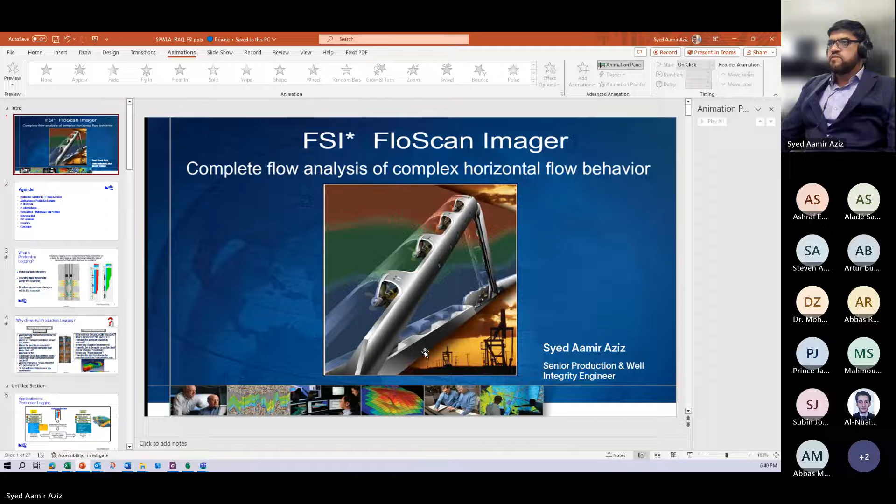Let me share my screen. Okay, you can see my screen, right? Slide view, clear. Yeah, okay.

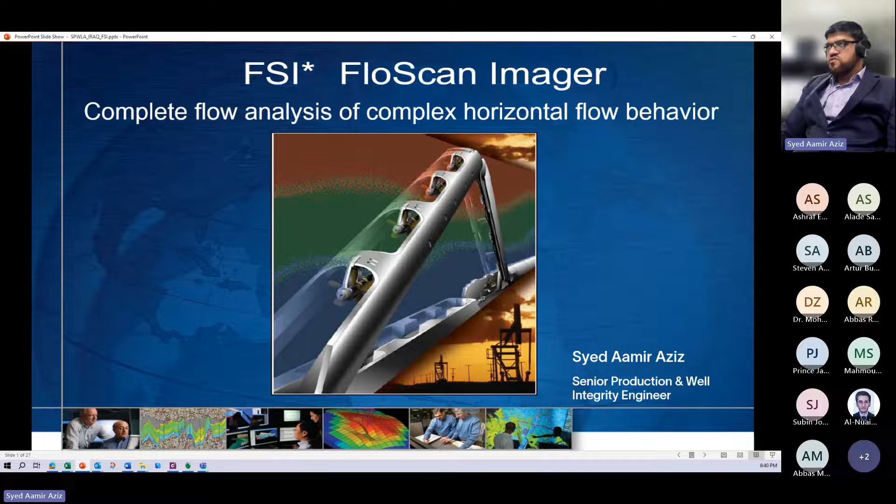Crystal clear. Okay, so today I'll be going through the FSI, FloScan Imager, an advanced production logging tool especially designed for horizontal and highly deviated wells. So we'll follow this agenda.

First, we'll talk about the basic concept of production logging, why we run production logs, what are the applications, benefits and advantages from the client perspective, and from a reservoir engineer or petrophysicist perspective, why do we need to run production logging and what problems can be solved by it.

Then we'll go through the production logging workflow we usually follow for acquisition and interpretation. Then I'll describe the techniques of production log interpretation in vertical wells, which is simple, and then more complex interpretation in horizontal wells, using the tool for horizontal logging, the FlowScan Imager or FSI. We'll have an overview of the FSI tool, how it works, what sensors it has, and finally I'll describe some examples or case studies for the FSI.

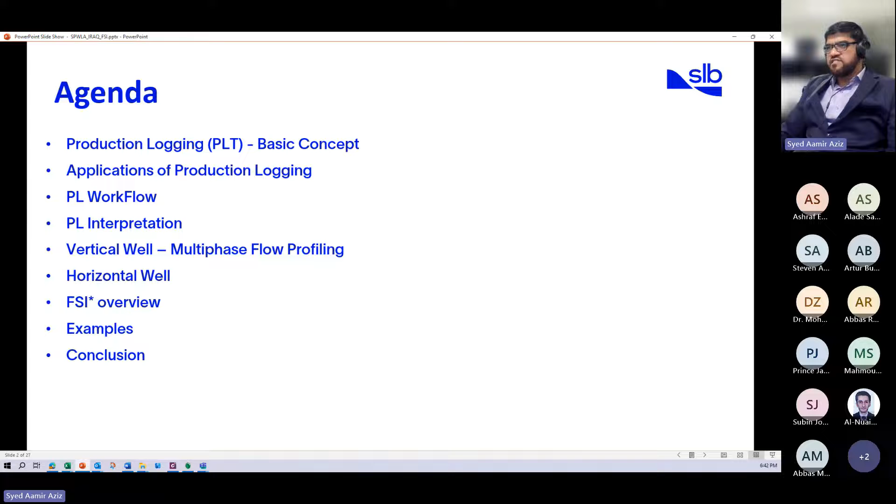So let's start with the very basic question: what is production logging?

So we know production logging is basically the measurement of downhole fluid parameters in an oil well or gas well, whether it's a producer or injector, when we want to know the production at downhole conditions and the zonal contribution from each perforation, what is being produced and where it is coming from.

For example, what is the source of water production, what is the source of gas production. All this information is acquired by running production logging tools, or PLTs, in vertical or nowadays horizontal or highly deviated wells. So the basic concept is to know the production profile downhole.

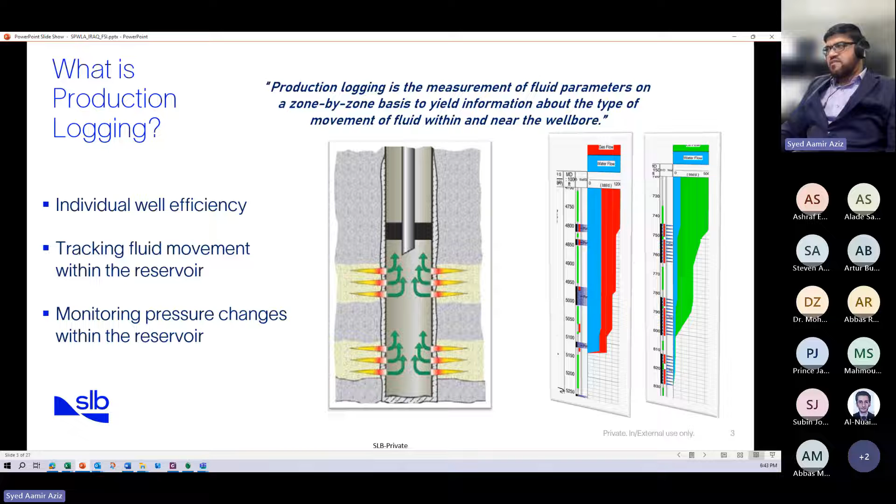This is the final answer of the production logging. What we get is the production profile of water, oil, or gas. Usually water is represented by blue, gas with red, and oil in green. So from each perforation, let's say you have a set of perforations in a vertical well, we learn what is being produced and where that fluid is coming from.

All this information, and more than that — it's not only about the production profile, but we get many other answers from production logging that we will see in the next slides, which is why we run these production logging tools. So there are some basic questions: why do we need production logging? Why does a reservoir engineer decide to go for a production logging tool or PLT? Why does a petrophysicist or any other engineer look for this information? There are some basic questions — what and how much is a well producing, and where it is coming from: water, oil, and gas.

If we want to know the contribution of what the well is producing and how much, usually we get surface test results, and we know from the test result, without running the production logging tool, how much the well is producing. But we don't know where that fluid is coming from. That's why we need production logging tools — to go downhole and locate the water, gas, or oil entry points, to do remedial work or to know the well's production profile.

In case of injection, a well could be either an injector or a producer. If it is an injector, we want to know where the injection water or gas is going, into which zones. Why is the well having a high water cut? In case a well starts cutting water, then definitely we want to stop that water and do a kind of bridge plug or other remedial work.

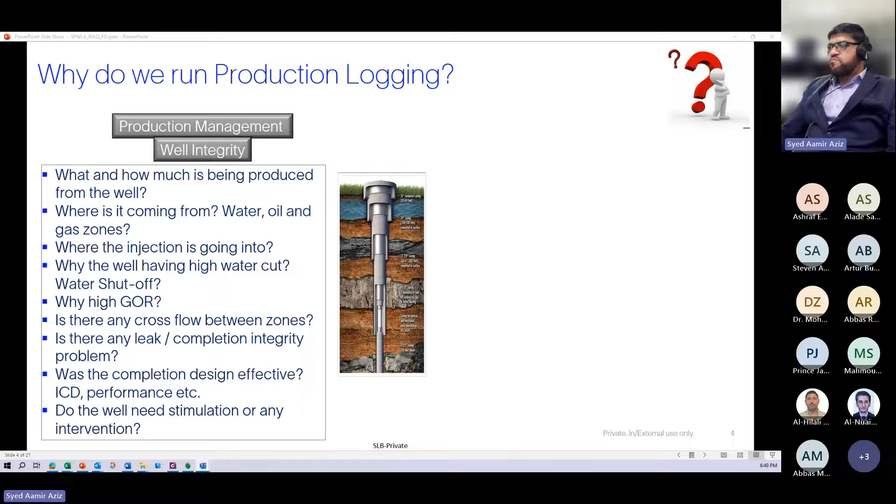And by the way, all these questions are basically for the production management or well integrity. So this is one aspect of the production logging. Nevertheless, the other aspect of the production logging is the reservoir management. This is on a bigger picture. So we do a production logging on a well by well scale. Secondly, we use this production logging data as on a bigger picture, on a reservoir level or on a reservoir level scale for the reservoir management.

So what are the uses of production logging data in terms of reservoir management? Is the reservoir dynamic model updated? So this is mainly for the reservoir, and this is, let's say, long-term design or long-term benefits of the production logging. On the left-hand side is on the well basis, and the short term is when you have to decide something on the basis of well production or well management. On the right-hand side is for the reservoir, and it's a long-term.

What is the current oil water contact or gas oil contact? Because reservoir conditions keep changing when the reservoir is put on, when fields are being developed and a lot of wells are being drilled and put on production. Then the reservoir oil water contact, gas oil contact - these contacts usually vary with time. So we need to closely monitor, as a reservoir engineer, all these parameters of the reservoir and put them into our reservoir model to get the updated dynamic reservoir model.

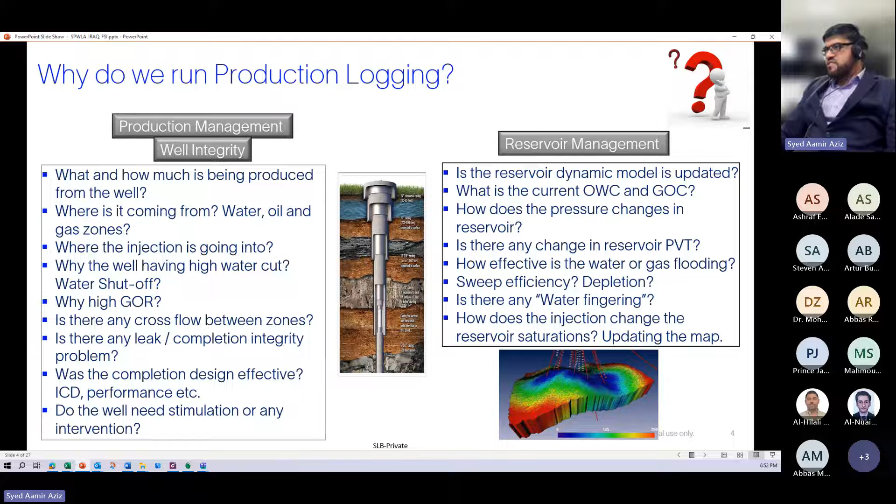How does the injection change the reservoir saturation? So when you put an injection strategy, then definitely you want to monitor the injection or water flooding because of the injectors, and how effective it is working as a strategy to produce more oil and restrict the water. So all this information can be obtained from the production logging, and hence the reservoir model can be updated with all these parameters.

What are the applications? Like we discussed already, we have a lot of different applications of production logging. It's not simply to know what the well is producing, but this knowledge of production logging, or the data, can be used in many aspects.

So you can see here - the production logging data is used for basically two purposes. First is the production management, and secondly the reservoir management, which is on the right-hand side. So the production management is the reactive fast loop, when you have to decide to run the production logging in terms of protection or restoration or generation.

There are many applications, like knowing the cross flow, zonal fluid, injection profiles, reservoir pressure changes, gas banking, PVT, and also well integrity issues like leaks, corrosion, and scales on the wellbore basis. So these are all applications of production logging in terms of production management.

On the other side, in terms of reservoir management, we use production logging data for simulation, mapping and monitoring, like gas oil contact, depletion, sweep efficiencies, skin factor, and reservoir boundaries. So all these applications are for the production logging data, and we get the answer to all these questions by running the production logging tool. These are the main applications.

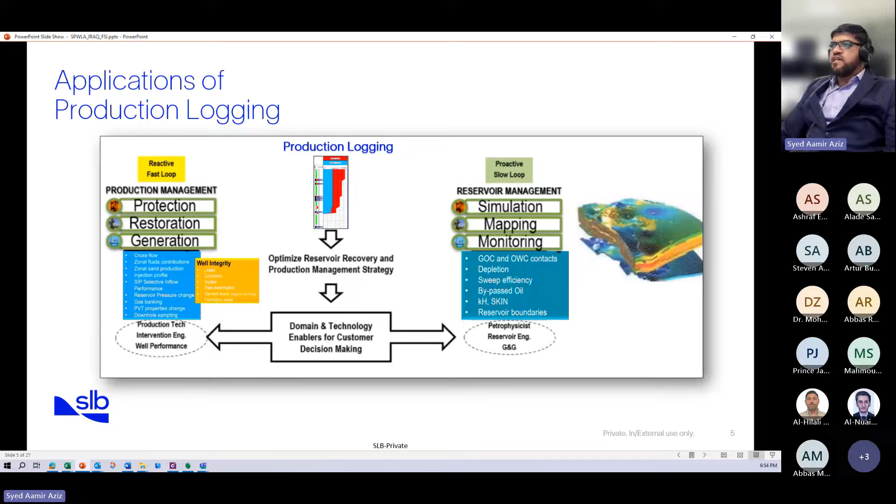Now, the technologies we use as downhole tools for production logging - the oil industry has been using these production logging tools for many years, many decades, from simple to complex, and there have been a lot of advancement in production logging tools.

Then we have some fluid identification tools. So when we know how much fluid is being produced, we want to know what is being produced - whether it's water, oil, or gas. So we need to distinguish different fluids, water from oil, or gas from water. We need some downhole measurements to identify the different fluids.

Similarly, we have a density tool, which we call gradient manometer, or there are nuclear fluid density tools. This density is not to be confused with the formation density - this is the production fluid density. So let's say if a well is producing a mixture of oil and water, this density tool will compute or measure the density of the fluid.

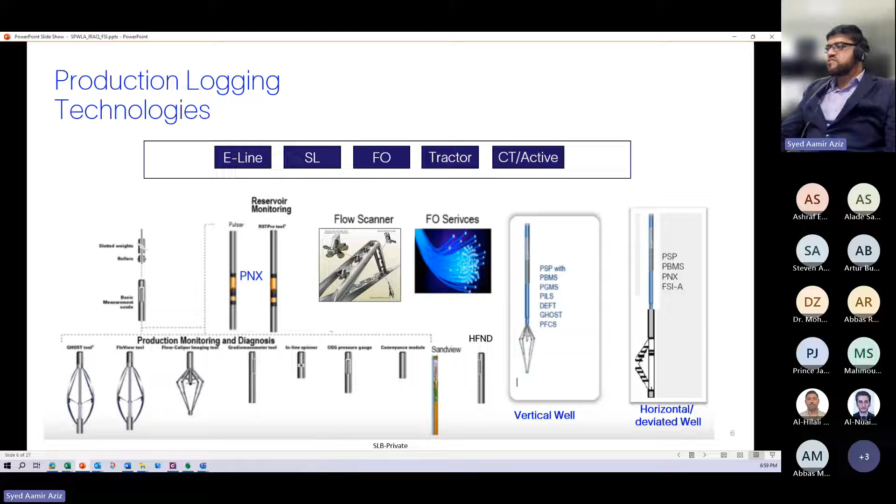In terms of production logging, it's an entirely two different approach. So basically, the production logging workflow starts with the pre-job.

When an engineer or petrophysicist selects a candidate well for production logging, let's say for zonal contribution or any of the objectives, whatever the objective of the production logging is, like we discussed earlier, it could be many objectives. So once we identify that a well needs to be logged with production logging, then we do a pre-job.

Planning, which involves knowing the objective of the job. Then we gather the previous or basic information on the wellbore, like the completion, how the completion is, is it an open hole completion.

Is it an ICD completion, or what type of completion is there. Then we might need some open hole data. It's good to have, not mandatory, but it's good to have the open hole density, porosity, and some open hole data. But what is more important is the deviation survey.

So normally we get this before running, or in the job planning phase, we get the deviations because the deviation affects the downhole flow and downhole flow regimes. So it helps us in the interpretation of the production logging - how the downhole deviation is, right?

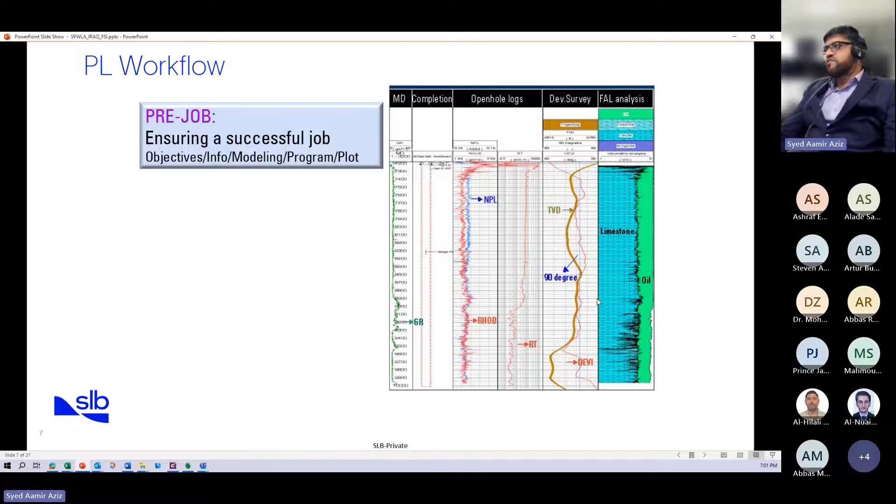So after the pre-job, when we have all this information, the second phase is the job execution on the well site. Normally this involves a logging truck and production logging tools. If it is a vertical well, then we go with the normal wireline, which can run the production logging tool.

With the help of gravity only in vertical and low deviated wells, let's say up to 60 degrees, we can go with the wireline. But if the deviation is more than 60 or 70 degrees, then we need either coil tubing or a tractor to push the tool to the bottom, so that we can acquire the production logging data.

So during the job execution phase, we run the logs and get real time data. Normally production logging tools, or the tools I'm going to show in the next slides, are surface readout tools, but we can still use them in memory mode. We get the memory data inside the memory.

When we pull out of the hole, then we download the data. But for real-time decisions, it's very important to run in real time with surface readouts, so we can decide on a real-time basis if there's any QC needed, or if we need to repeat the passes, or if there are data quality issues and all these.

So it's very important to see the data real time before the rig down, to decide if the data is enough, or if it's good quality data which can be used for the next phase or interpretation.

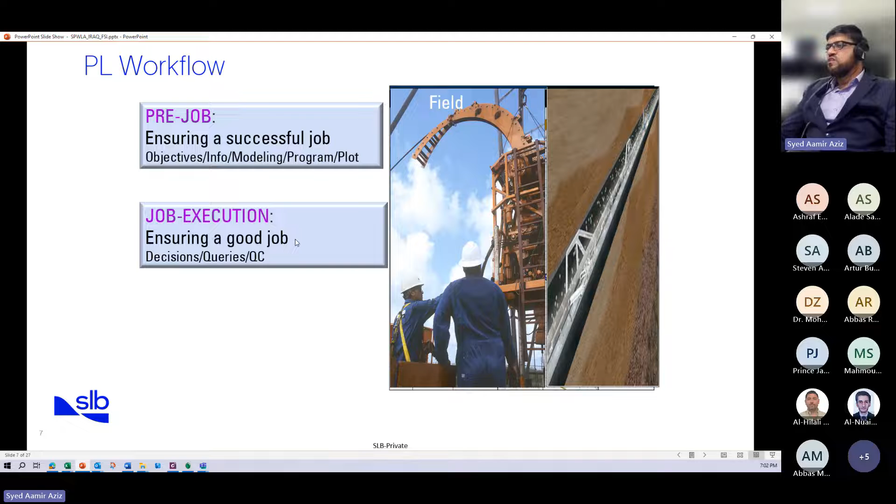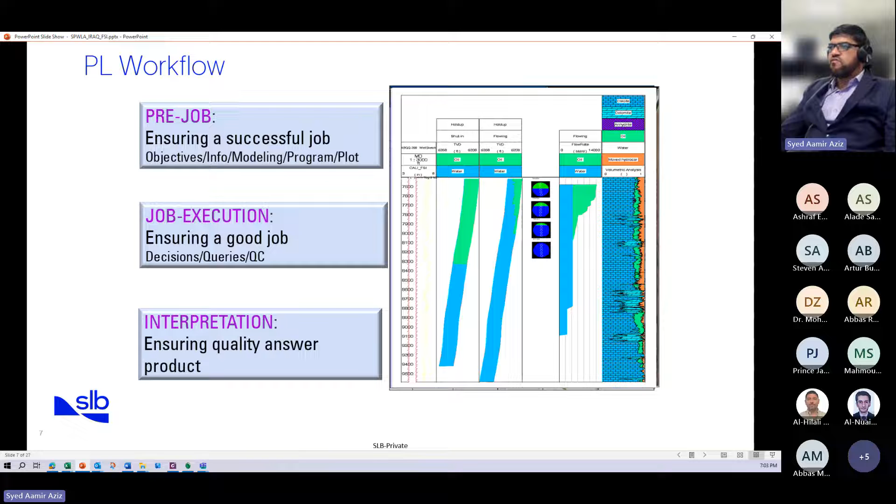So that's the usual workflow we follow.

Now, talking about the production log interpretation, like I said earlier, it has two basic approaches. One is used for vertical wells, which is totally different, and secondly, for horizontal wells, which is more complex and a different approach, with even different tools used for the production logging.

Why is that? Because the flow behavior inside the wellbore is totally different in vertical wells. Let's assume a vertical well, when you have different sets of casing - surface, intermediate, and production casing - and let's say the production casing is perforated in different zones, or you have a barefoot open hole completion or whatever. So this is a basic design of the well.

So when the well starts producing, then we do this production logging during the dynamic condition when the well is on production.

Usually, as an approach for production logging, we do a static survey in the static condition, which means the well is shut in. For production profiling, we do production logging while the well is flowing. So we need to flow the well and keep it flowing until it stabilizes in terms of pressure and temperature.

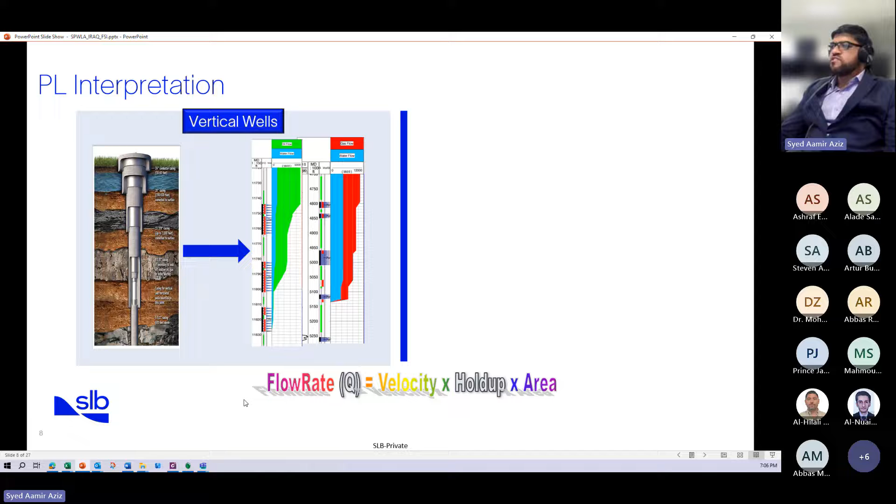The second approach, which is more complex, is the horizontal well. Nowadays a lot of horizontal wells are being drilled - some long horizontal wells, or extended reach, maximum reservoir contact wells, which can even go 30,000 feet as a horizontal lateral. In the Middle East especially, some multilateral wells are being drilled with different designs, like fishbone wells. These horizontal wells are very complex in terms of flow behavior when they are put on production.

When we monitor the production logging, it's a totally different approach in terms of interpretation, in terms of where the flow is coming from.

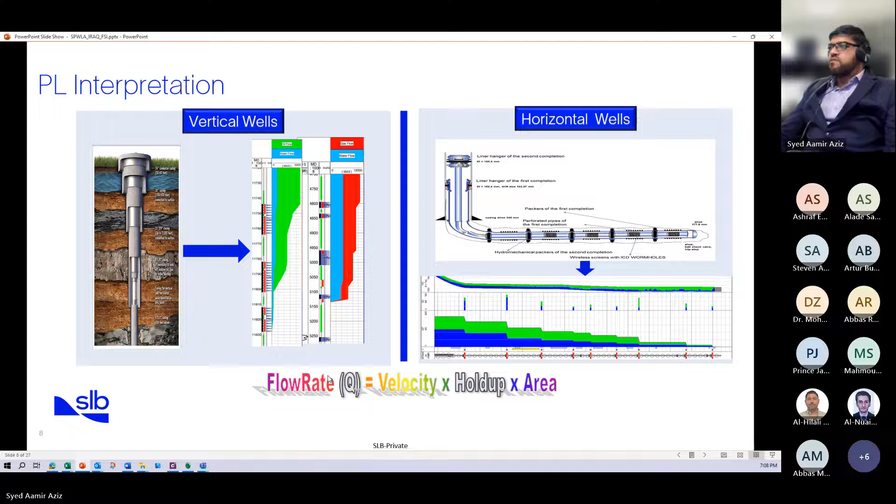Now moving into production interpretation in vertical wells, I'll show one or two slides for vertical wells, just to get an idea how it is different in the vertical well, and how it is complex in the horizontal well.

In vertical wells, the production logging is simple. We use a spinner, which measures the downhole velocity in terms of RPS, or rotation - the higher the flow velocity downhole, the more rotations this spinner or propeller will get, and it reads different RPS. Normally production logging data is acquired in multiple passes.

So we do up passes and down passes. Up passes are usually taken as a negative cable speed, and down passes are normally taken as a positive cable speed. Why do we do multiple passes? Because we get the spinner slope or threshold. This is the cross plot of the spinner - normally we select the zones, and from each zone we get the slope and threshold, which are used for the downhole velocity computation.

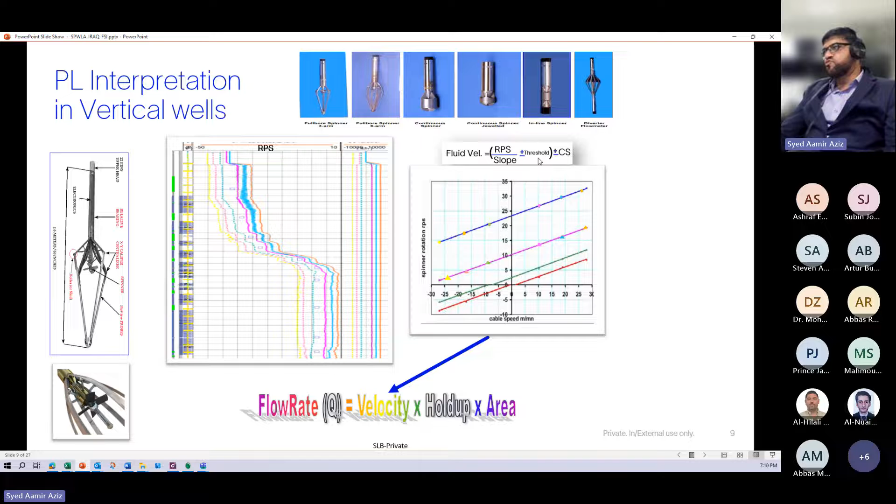Remember, the spinner is actually measuring rotation per second, so we need to convert this rotation per second into velocity. We use a very simple calculation - a slope, the cable speed, and the threshold - to compute the downhole fluid velocity, because we run at different cable speeds. Each cable speed has a different curve, because the faster you go, the faster the spinner will turn.

When you go up in the direction of flow, if both the flow and the tool are going in the same direction, that will reduce the spinner RPS. So we get multiple RPS readings even when the flow is the same - even in stable flow conditions, let's say a well is producing or injecting 1000 barrels per day.

Since we do a lot of down and up passes, that's why we get a different RPS because of the cable speed. When we plot this cable speed against the rotation, we get a straight line, and from the slope of that line and the threshold, we compute the downhole velocity.

So the basic equation for measuring the downhole flow rate is very simple. We need a velocity, we need hold up, and we need the area. So what is the hold up?

Hold up is basically the fraction of pipe covered by each phase. When I say each phase, it means in terms of a producing well, in dual phase or three phase, let's say oil, water, gas. So if a mixture is being produced, then we need to know the percentage of each fluid. But if it is an injector, like in this example, then we don't need hold up, because we know the well bore is 100% filled by either water or gas. If it is a water injector, the well bore will be filled with water. If it is a gas injector, we don't need to know the hold up - we know the hold up is 1.

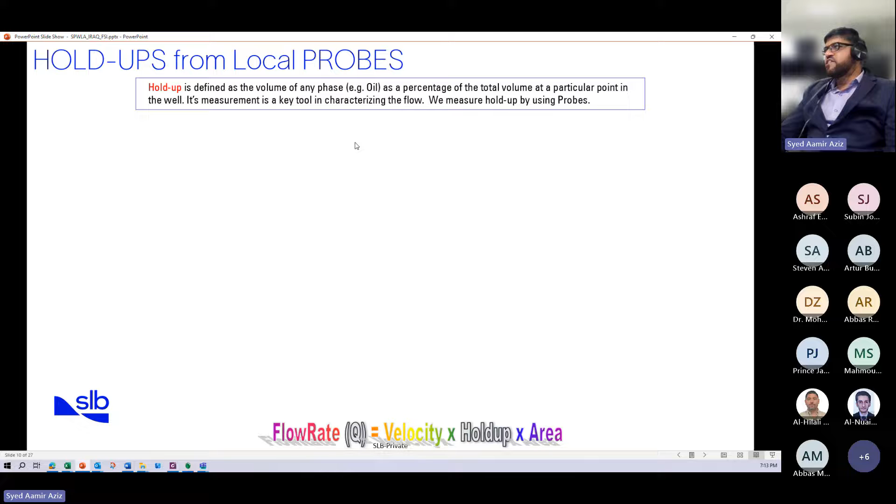Let's say a well bore is filled with different fluids - we have gas bubbles, water on the left side, and the brown representing oil. So let's say a well bore is filled with a mixture of oil, water, and gas. Hold up is basically the percentage of each phase in the cross section of the pipe. Let's say in this scenario, 81% of the cross section is covered with oil, 15% with water, and 4% with gas, but not to confuse with the water cut.

Hold up is different than the water cut. Water cut, when we say water cut, is measured at the surface. If the well is producing 50% water, let's say, then the water cut is 50%. If the well is producing, let's say, 1000 barrels of oil and 1000 barrels of water, then we say the well is producing 50% water cut. But hold up is a fraction of the occupied volume inside the well bore, which is different from the water cut.

So it is possible that you see very little water, 15% water hold up, but at surface you are producing 40% or 50% water. So these are totally two different things, right? Just not to confuse with the water cut.

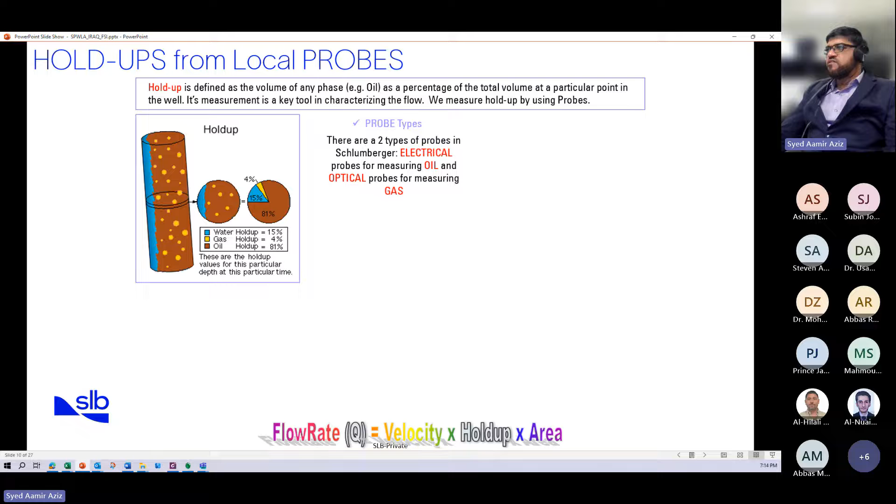Now, how do we measure the water hold up from the probes? We use electrical probes and optical probes that I showed in the DEFT and GHOST in the earlier slide. These are technologies used for the direct measurement of water holdup in a mixture or in a stratified flow, when the fluids are separated, or in the form of a mixture. In both cases, we can use these electrical and optical probes to identify the water, to distinguish water from the hydrocarbon or gas from the liquid.

So basically, the first probe we use is called the electrical probe. It works on the resistance of the fluid. We know water is more conductive and hydrocarbon is resistive to the current. So when the tip of the probe passes through the hydrocarbon bubble, let's say oil or gas, then the circuit is broken, and it reads 0. This means the probe is inside the hydrocarbon, which is the non-conductive fluid. When the probe is inside the water, then it reads 1. So it's kind of a binary measurement, and it's basically counting the bubbles as the tool goes down and hits the bubbles of water or any type of mixture downhole.

So it can accurately identify the bubbles of hydrocarbon inside the water phase, or the bubbles of water inside the hydrocarbon continuous phase. This gives a direct hold up measurement, and its electrical probes can distinguish hydrocarbon, whether it's oil or gas, from the water phase.

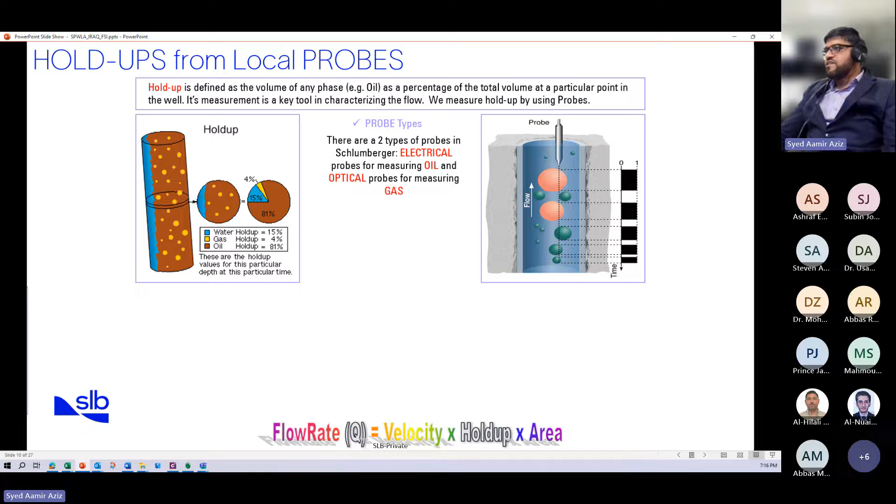Now, when we identify the water holdup, the next thing is the optical probe in order to measure the downhole gas holdup. So the physics of the optical probes, as its name indicates, is based on the optical parameter of the fluid. The optical probes measure by sensing the change in the light in the gas compared to liquid. So there is something called refractive index.

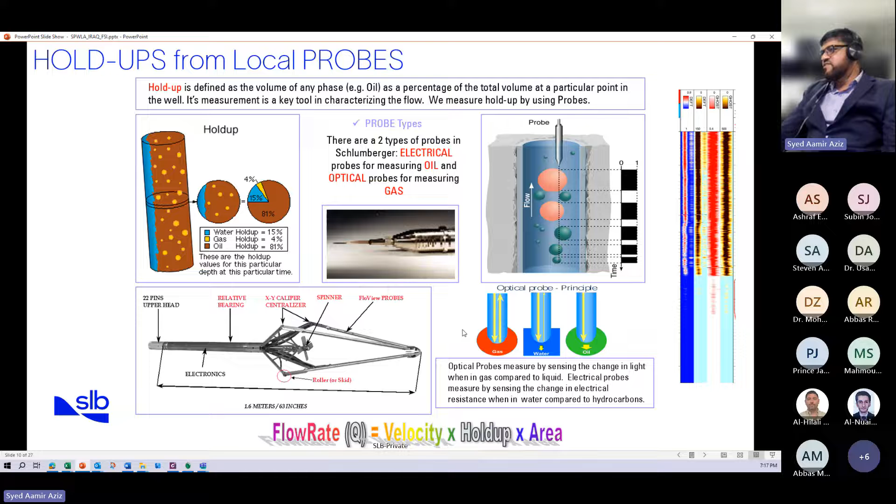So we see the refractive index of gas is different from the refractive index of water and oil. We have enough contrast between the refractive index of gas and the liquid. That's why this optical probe uses the refractive index theory in order to identify the gas bubbles from the liquid.

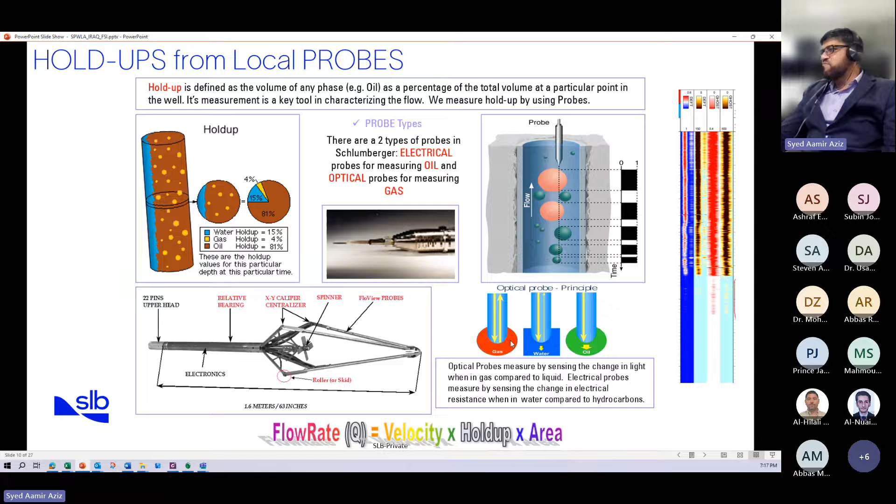In the vertical well, the fluid is homogenized, or is flowing in the form of a mixture. So you cannot say that it's 100% water or oil, but if the well is producing water and oil together, it will form a mixture, and this mixture will flow inside the well bore.

And from the modeling, we can know the flow rate of each phase: water, oil, and gas. This is the final answer product. Usually we give in the interpretation report how the downhole flow profile looks like. So this is an example of the final answer product from the production logging for vertical wells.

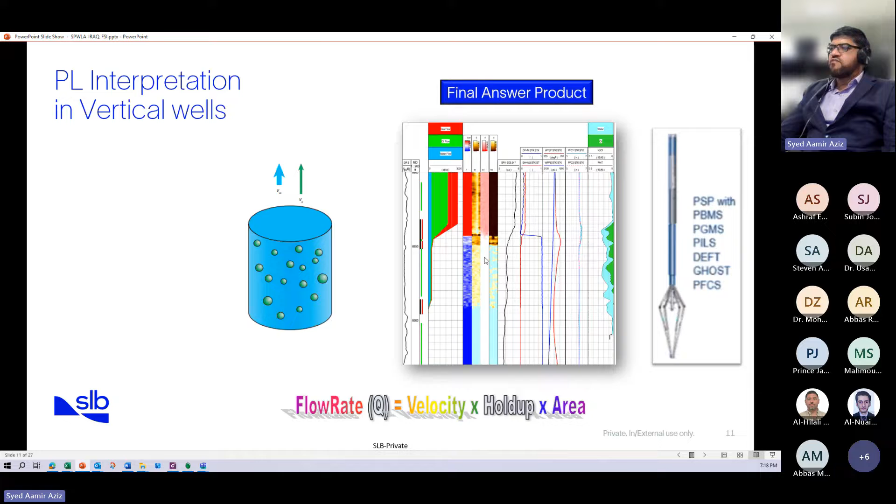Now, quickly talk about horizontal production logging in horizontal wells, which is mainly the topic. I just wanted to show you how two different approaches are used for horizontal and vertical wells. The production logging in horizontal wells has a totally different approach.

Why? Because when the well deviation is more than 80 degrees, like you see here, when the production fluids, oil, water, or gas, flow inside the horizontal section of this pipe, they behave totally differently than if produced in a vertical pipe. So it's two different scenarios. Vertical pipe means a mixture, but in horizontal, it's a totally different thing.

Why is it totally different? Because of gravity, we have phase segregation. What does phase segregation mean? We have three different densities of fluid: a lighter fluid, which is gas, a little bit heavier, which is oil, and the heaviest is water. Because of gravity, these three fluids will separate out in the horizontal section.

But as soon as they reach the deviated or vertical section, they mix together. So when the well is drilled horizontally, in the horizontal drain, and we want to know where the water, oil, or gas is coming from, we do the production logging. Then it's very important to know how the flow behaves inside the horizontal section.

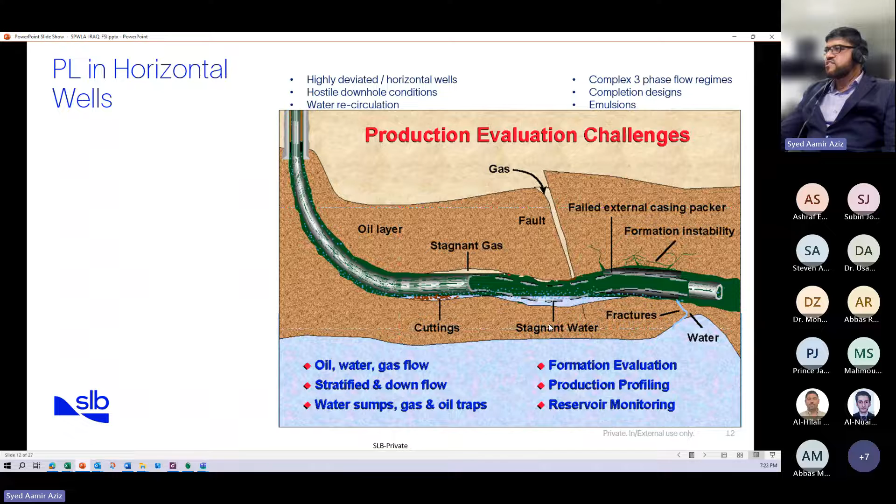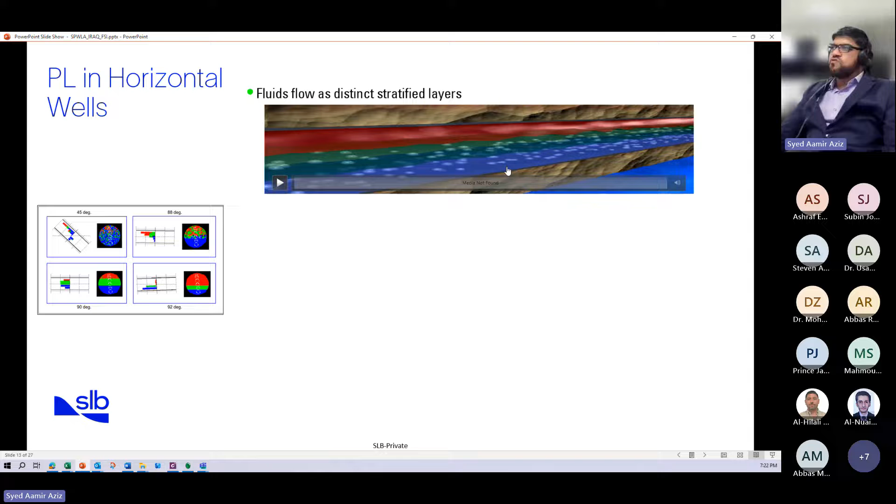Now, you see here on the top picture, fluid flows as a distinct stratified layer. In the horizontal section, the water stays on the bottom side of the well bore, oil in the middle, and gas always flows on the top side because it's the lightest phase. Because of gravity segregation, if the well is producing three phases, water, oil, and gas, they will be separated by gravity downhole. So it's no longer a mixture, it's a stratified flow.

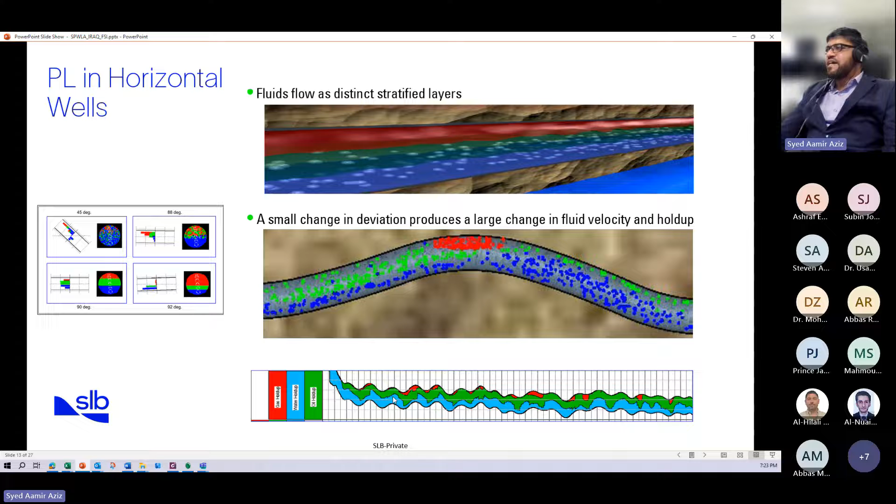If the well trajectory were perfectly 90-degree, when we say horizontal wells, it doesn't mean it's perfectly 90-degree. When they drill the well, the well placement engineers are not always exactly at 90-degree. So we see areas with less than 90-degree and areas with more than 90-degree. Usually the well is not perfectly horizontal, but more like sinusoidal. Sometimes the trajectory goes up, sometimes down. This change in variation, even if it's just 1 or 2-degree, will change the downhole flow behavior completely.

Let's assume a small portion of the horizontal section, like in this picture in the middle. On the right hand side, you see a lot of blue color, meaning water, because the deviation here is 88-degree. It's not 90-degree, just 2-degree below perfectly horizontal. So what's happening because of only this 2-degree?

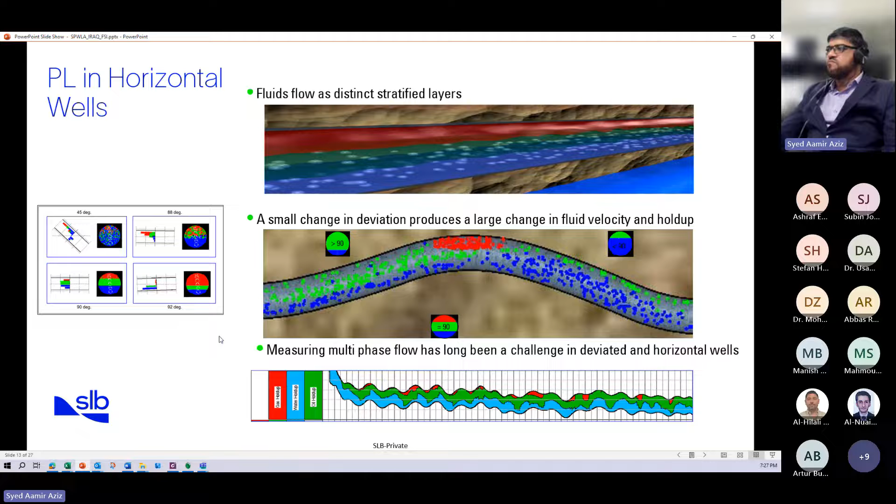When we have 88-degree, the gas velocity is high, but it occupies less volume, like this. At 92-degree, 90-degree, measuring multi-phase flow has long been a challenge in deviated and horizontal wells, because of the change in the deviation.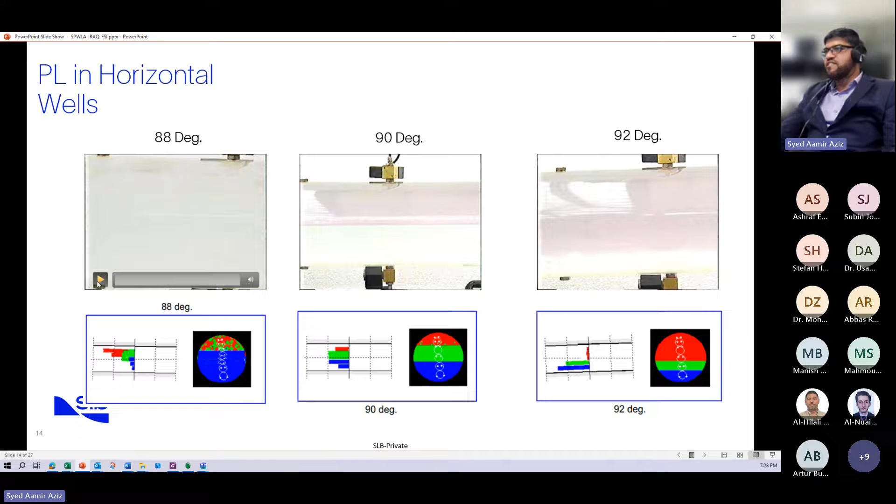Here I hope you can see these small videos of the flow loop experiment done in France at the Schlumberger facility. They created a loop to study the flow behavior. First, they put a horizontal glass pipe tilted to 88-degree, not perfectly horizontal, and injected from the side two different density fluids, one lighter, one heavier. Since it's transparent, they injected dye to differentiate the colors, so you can see how the liquid behaves.

So what's happening here? The red color is the lighter phase, moving very fast on the top side of the pipe, while the blue color, let's suppose it's water, occupies almost 80 to 90% of the well space. You see a lot of blue color, occupying most of the space, but moving very slowly. This is what's happening when the flow loop is put at 88-degree.

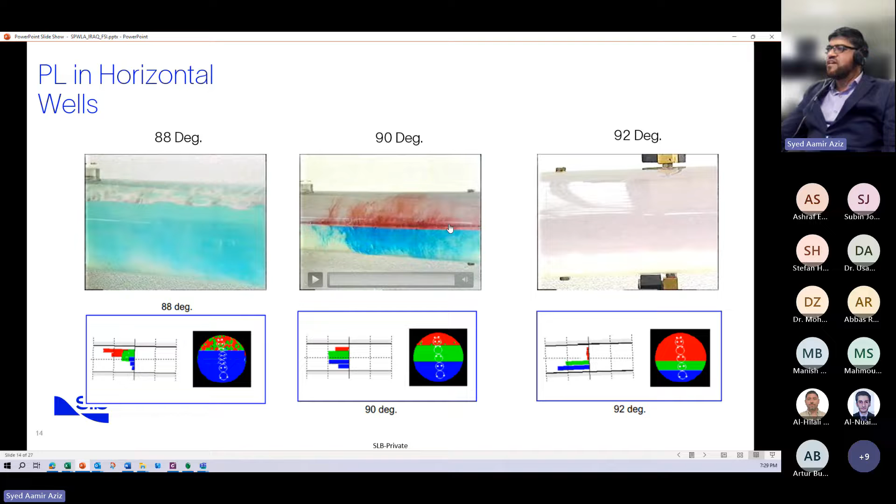Now let's assume the pipe is perfectly horizontal, exactly 90-degree, and we have two phases, one lighter, one heavier. How do these two phases behave? You see here they are equally distributed in the cross section of the pipe, and they flow with almost the same velocity, the same speed. This is what happens when you have a totally perfect 90-degree.

Now what happens if the wellbore trajectory is more than 90-degree? You are basically going down slope. When we do the flow test, you see what's happening: the heavier phase flows very fast on the bottom side of the wellbore, while the light phase occupies a lot of volume. You see a lot of red color, which is the lighter phase, but it's flowing very slowly.

This picture on the bottom shows the velocity profile. Red color is the gas, on the top side. Although it occupies a lot of volume, it moves at a slow speed. Similarly, at 88-degree and 92-degree, you see three different scenarios and three different flow behaviors. So it's very important to know the deviation at the point where you are measuring the flow.

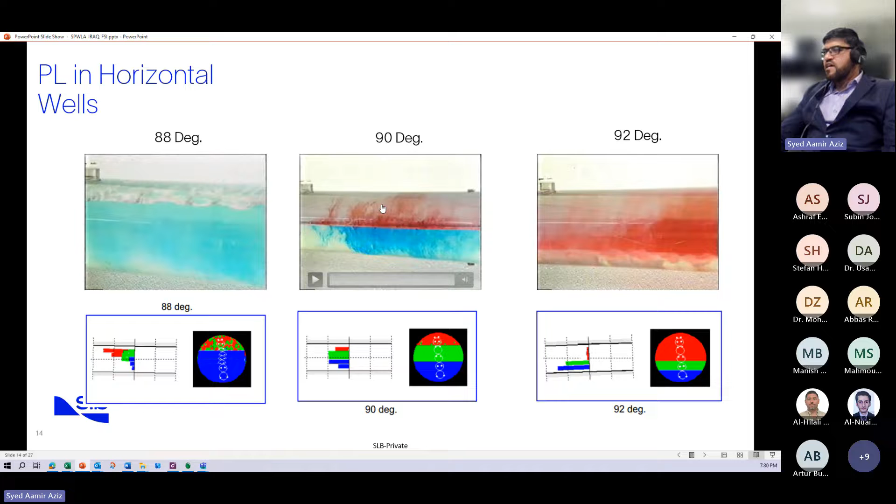From that, we need to measure the exact velocity of each phase and the exact holdup of each phase. To handle all these complexities I've shown in the previous slides, it's very difficult to interpret or get the production profile and production logging data in horizontal wells, especially with changing deviation, different types of completions, and different scenarios like water sumps. For all these challenges, we use an advanced array production logging tool, which uses multiple sensors to measure the localized velocity and localized holdup of each phase.

Let's assume in a stratified flow, gas is on top, oil in the middle, and water below. If you have a single spinner, it's not giving you anything useful. Half of this spinner is inside water, flowing with a different velocity. The middle is in the oil, more representative of the oil since it's in the middle, but it's also touching the gas. The holdup or distribution of gas, oil, and water inside the wellbore trajectory can vary, so a single spinner isn't measuring meaningfully, its reading is affected by the velocity of different phases, and it doesn't give you meaningful downhole measurements.

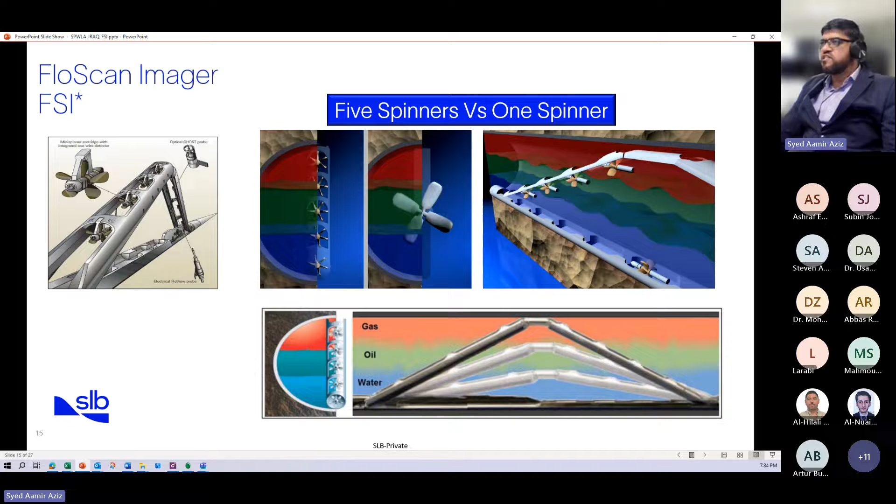So this tool will give you an answer for the production profile, and it can accurately measure the localized holdup and velocity. From those localized holdup and velocity, we compute a complete 3-phase production profile in the horizontal section, even if there is recirculation or complexity in the wellbore trajectory.

Now, this slide is basically showing the location of the sensors in the vertical cross section of the pipe. These dots, blue and red, are the probes. Blue are the electrical probes, and red are the optical probes for gas detection. The black circles are the location of the mini spinners. So you can see we have 5 spinners and 6 sets of electrical and optical probes to have full coverage of holdup and velocity at a single depth.

Usually, previously the horizontal wells were logged with different sensors, and usually those sensors are very much apart from each other. So let's say one sensor is measuring the gas holdup, on the top of the tool string, which is like 30 feet from the spinner, and the spinner is measuring the velocity. So it's very complicated when you are not exactly at the same measurement point.

This tool is very short, and it has all the sensors within a very short length, and we are measuring the real-time downhole velocities and real-time downhole holdups from these sensors and the spinners.

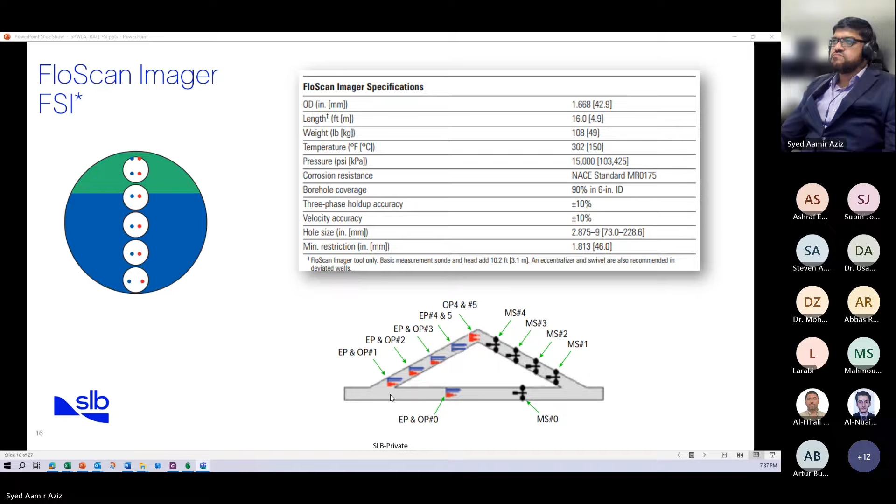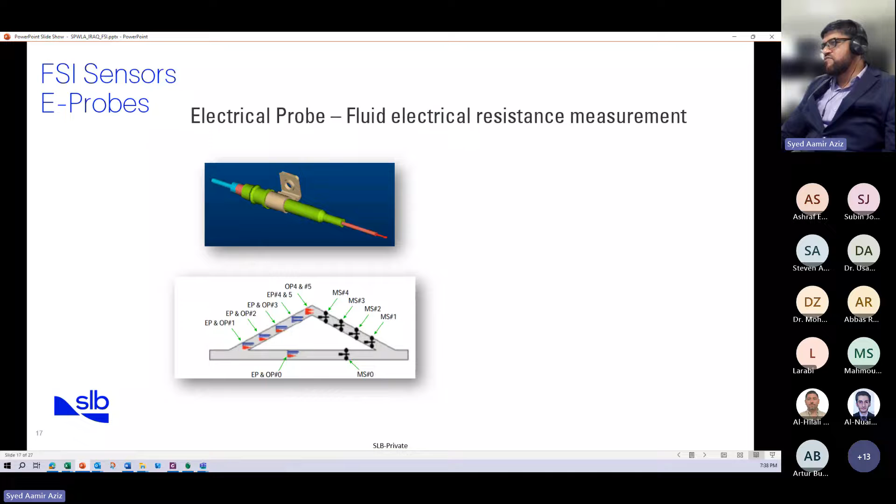Now, these slides will show a little bit about the FSI electrical probes. I already explained the principle of the electrical probes. It uses fluid electrical resistance measurements to identify water in a continuous hydrocarbon phase, or hydrocarbon in a continuous water phase. So it works on simple binary principles. When the probe hits an oil bubble, it reads non-conductive as 0 and conductive as 1, and it counts the bubble counts, and from those bubble counts, using the algorithm, we can accurately measure the downhole holdup of water and hydrocarbon.

On the other hand, optical probes are based on the fluid's optical refractive index. It sends a light source, which emits into a small Y coupler, and when this light sees in front of the probe - let's say if there is a gas bubble - most of this light will reflect back. So if we have more light coming back, it's identified as gas.

It has probes. The picture here is only showing one probe, but remember these are 6 probes located at different locations inside the tool. So this is how we are measuring the holdup of each localized phase, oil, water, and gas, and the velocity.

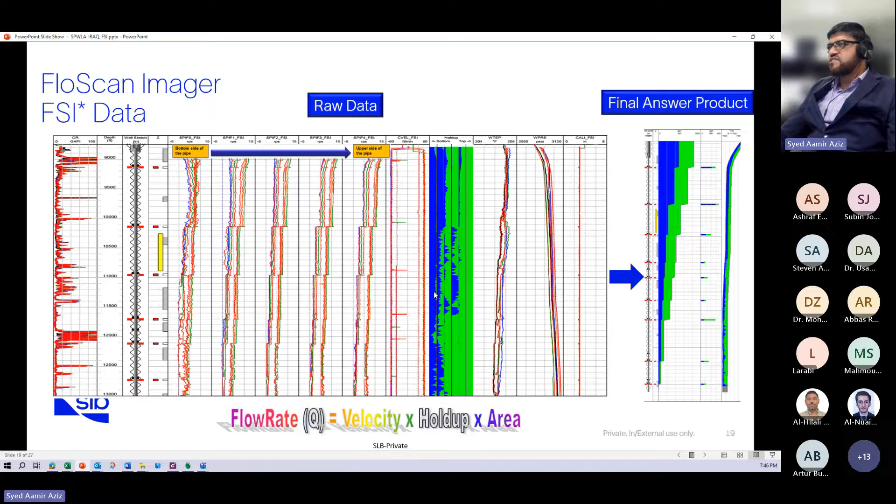So this slide was showing the typical FloScan Imager raw data converted into the final answer product. What happens sometimes? Because this tool, as I showed earlier, is mechanical, it has mechanical spinners and probes which have to pass through the bubbles of oil and water. It has an exposed tip of the tool which has to physically touch the water or oil phase in order to distinguish based on the resistance or the refractive index principle.

So these sensors should always be physically touching the downhole fluid in order to measure. This is why it's called direct measurement, without any assumptions, without any modeling. It's directly measuring the downhole representative velocities of each phase and the holdup of each phase.

But what happens sometimes is these tools come up, because of the downhole condition, with all this debris or sticky material, sometimes like tar or emulsions, or just a lot of dirty downholes. These spinners, since they are very small and miniature, sometimes get clogged because of the downhole condition. It's not always, but we see it a few times.

Sometimes we see that these spinners are not turning very well, because out of 5, let's say 1 or 2 spinners are down. Then we need to rely on the other spinners, since we have 5 spinners and 2 phases. So if 1 spinner is down, we can use the other spinner for the velocity computation.

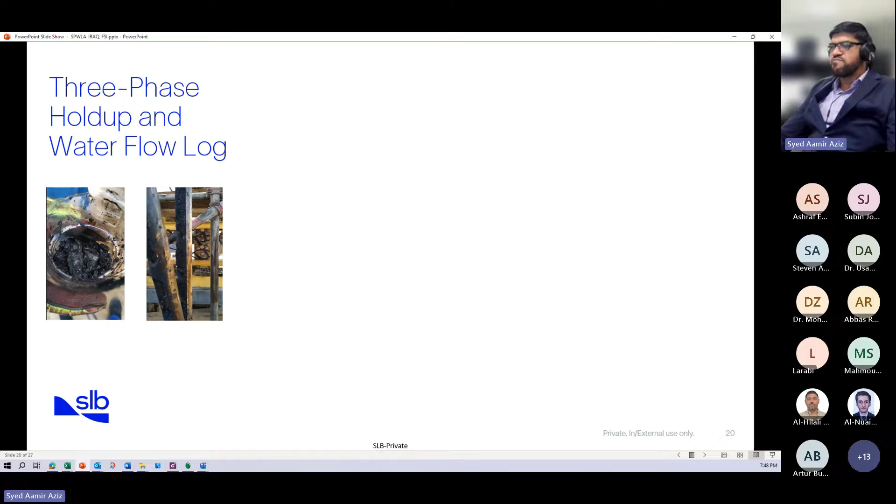But sometimes it happens that all these spinners are closed. This is very rare, by the way, but it happens. The electrical probes are blinded because a small film of tar sticks to the probes and makes them blind, so they cannot distinguish water and oil or gas sometimes.

So what do we have to do then? If the electrical probes or the spinner data is not working, there should be an alternative. It's not always the case, as I said, in maximum cases these sensors give good data, but in this condition we have to rely on other measurements.

These are sometimes used in the form of the PNX tool, or nuclear measurements. We call it RST or PNX, for reservoir saturation tool. Those tools are used for the 3-phase holdup measurement because the probes are not working, and the water flow log is used for the water velocity.

This is the spinnerless computation of the downhole direct velocity measurement based on the oxygen activation of the water. It has 2 detectors, near and far, and the neutrons bombard the oxygen, activating it in the flowing condition. When the oxygen or water flows up, it measures the time, and since we know the distance, from the time and distance we measure the downhole velocity of the water.

This is based on the station log. It's not a continuous log; we stop the tool and measure the water flow velocity at that depth, then move up to the next station and repeat. Similarly, this is a continuous pass measurement for the three-phase holdup, and from these nuclear measurements we get the phase distribution in terms of holdup measurement for gas, oil, and water.

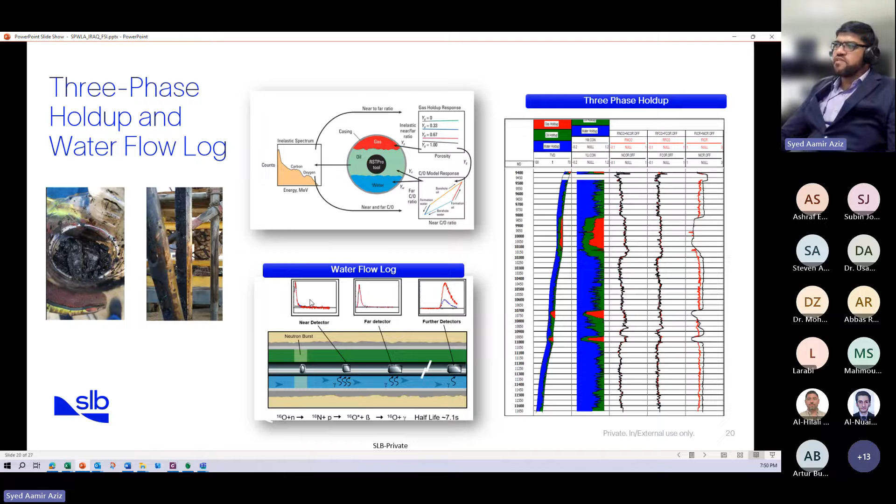Apart from the probe measurement, this is a totally different physics used for the holdup measurement, three-phase holdup measurement, whether it's a vertical well, deviated well, or horizontal well, and we get the water velocity from a measurement other than the spinners. So sometimes we integrate this data into the model to compute the profile.

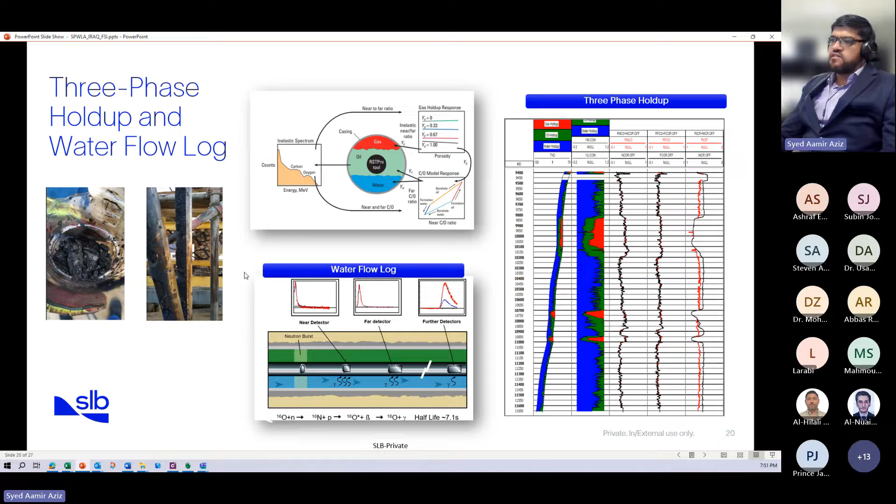So this is the first example. We logged with the flow scan imager one of the wells, where we see the early water breakthrough, or what we call water fingering. So in the reservoir, when you have a high permeability streak or a high permeability layer, it's susceptible to high water coming into the wellbore very quickly because of that high permeability, and sometimes the oil also flows to that zone, and then water follows the oil.

So what happened in this particular case, when we logged this well, we found that 92% of the water was coming from a single point. Normally we see a homogeneous flow profile. A good profile looks like all the zones are producing, but sometimes it happens that all the production is coming from a single point. Like in this case, only two points: 92% from here, and the rest of the remaining production from this other point.

As you can see, the temperature is also giving a very good indication of the heating effect here, showing a very strong entry of oil and water here, and here also, right?

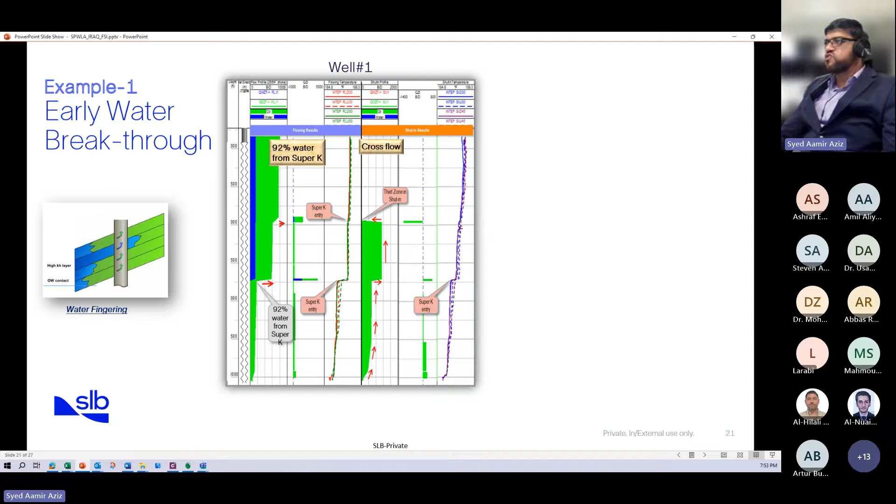So this was a very interesting scenario for the customer, for the client, when we ran this log, and they were surprised to see that their well was only producing most of the fluid from two single sources. We integrated this data with the image log to know if there was any fracture, and we found out later on that there are some faults or fractures at these depths.

So these are the usual signatures of fault behavior, or super K, or high permeability streak cases, where water and oil come from a single point. This was an open hole completion, so there was nothing, no perforation—the well was left open hole, barefoot. The next step, if we see this kind of behavior, is it's a good candidate for inflow control devices, ICD completion, to homogenize or distribute the overall flow in order to get the reservoir in a homogeneous condition—not flowing from one layer, but flowing from all the layers, or depleting from all layers equally.

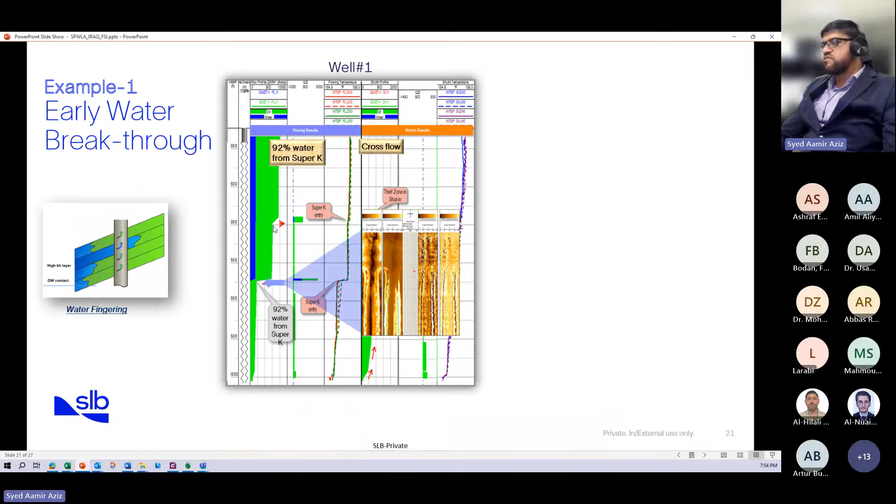Similar case in well 2: we see all the water—although this was an oil well—coming from a single source, the same thing, and it could be either because of a fault or fracture in the zone. So these things happen, and this is the value of production logging.

When we run downhole, we get to know what the problem is inside the wellbore: is there any early water breakthrough, early gas breakthrough, why is water produced from a single zone, or whether the water is coming from only the bottom or top. So, to get a full picture of the flow downhole...

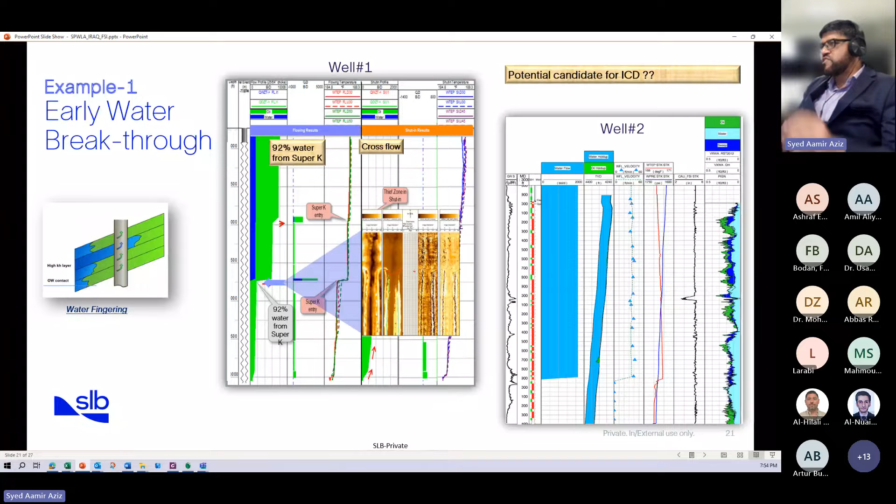This is example number 2, also showing the value of the FSI, or array production logging tool. On the rightmost track here, you see the wellbore is almost filled by 80 to 90% water, shown here with the blue color. On the top side, you see these red spots—these are the gas, the presence of gas inside the wellbore. Then you see a little bit of oil shown in green color. All in all, almost 80% of the wellbore is filled with water, but in fact, this well was not producing any water at surface. So it's quite surprising.

When we go log downhole, all this water is stagnant water, or recirculating water, it's not showing up to the surface. But the wellbore trajectory was a horizontal open hole. You can see the completion here in the well sketch. This was an open hole.

So we go with the 5 spinner or the FSI tool. If we assume it was a single spinner, then the spinner will be in the middle and it will only be measuring the water velocity, which is not flowing. So we got nothing. Thanks to the multi-array production logging tools, when we have multi-sensors, the top spinner in this case, spinner number 4, was able to measure the small portion of the oil and gas velocities, while the bottom 3 spinners were in the water phase, which is not flowing.

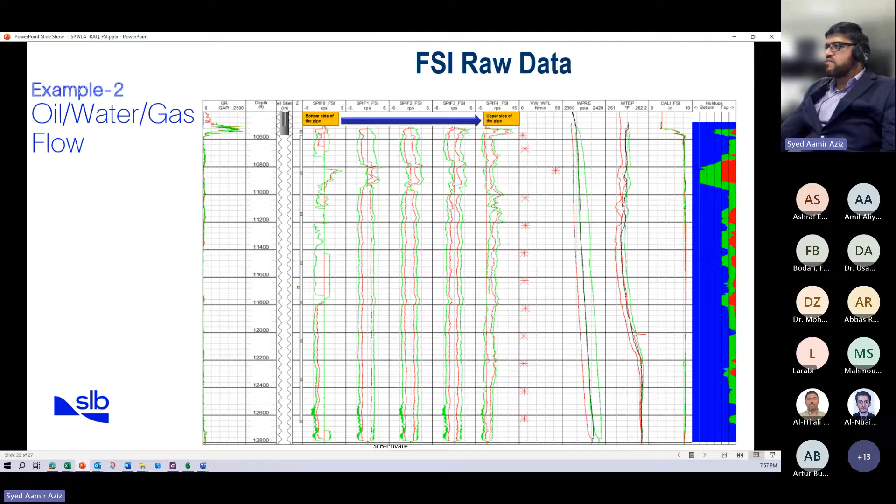So here the top spinner saved us by giving a good oil and gas flow profile downhole, and we get the flow profile mainly from the top spinner interpretation, and the second from the top, those were in the lighter phase, while the bottom 3 spinners were reading the water, were in the water, so those were not used in the interpretation. So this was the final production profile.

Then we put the holdup profile, temperature, pressure. The interesting thing to notice here is the temperature is showing a cooling, right? You see at this point, at 12,200, we see a drop in the temperature.

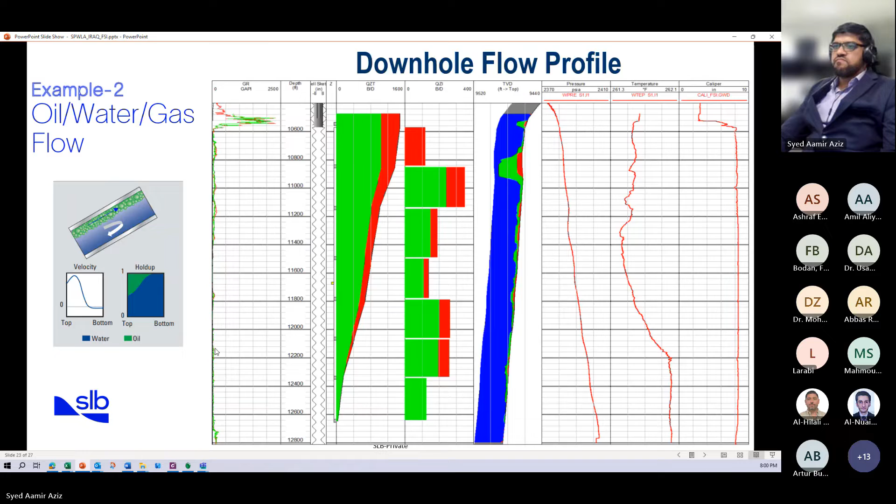Now this is the last example. As I showed, the FSI log is very effective in horizontal logging when the hole deviation is more than 80 or 85 degrees - this is the common perception. But in a deviated well, for example this well at 50 degree deviation, we still need the FSI. Why? Because this well is a very low flow rate well, producing only a few hundred barrels of oil, only oil and gas. The client saw 450 and zero water at surface, and the well deviation was 50 degrees.

So the client decided to go with the flow scan imager with 5 different spinners and compared the data with the conventional single spinner.

So like you see here, 5 spinners, 3 of them are reading negative velocity. This is because of the recirculation.

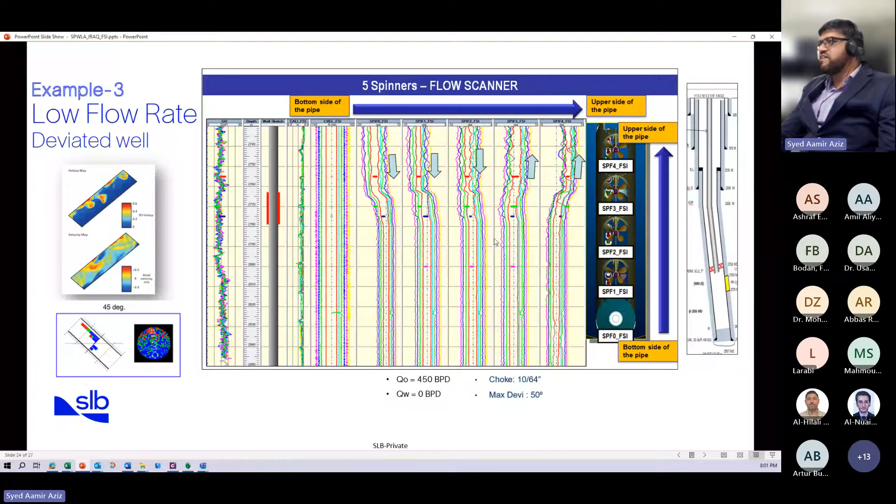And the top 2 spinners, number 3 and 4, are reading positive velocity. So what is happening here? You see these 2 pictures. On the bottom side, the water is recirculating, the heavier phase is recirculating, and that's why some of the spinners are reading negative and some, on the top side, reading positive. So 2 different directions of flow are happening here. That's the value of FSI.

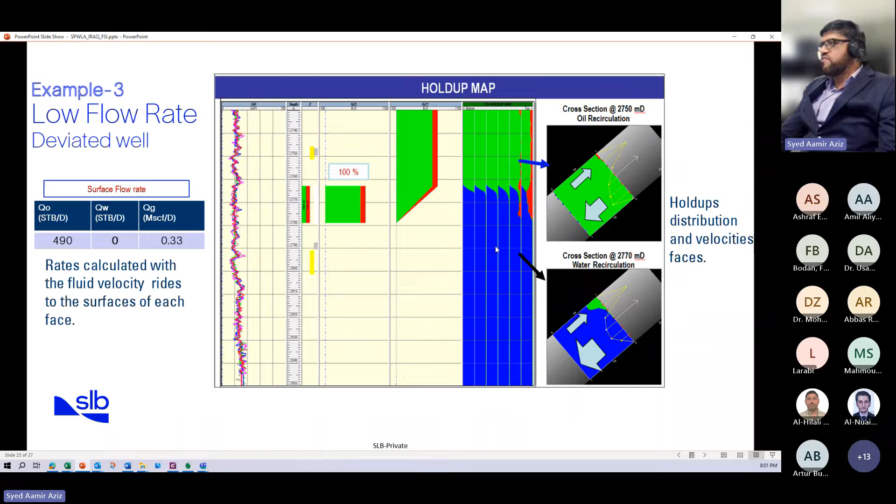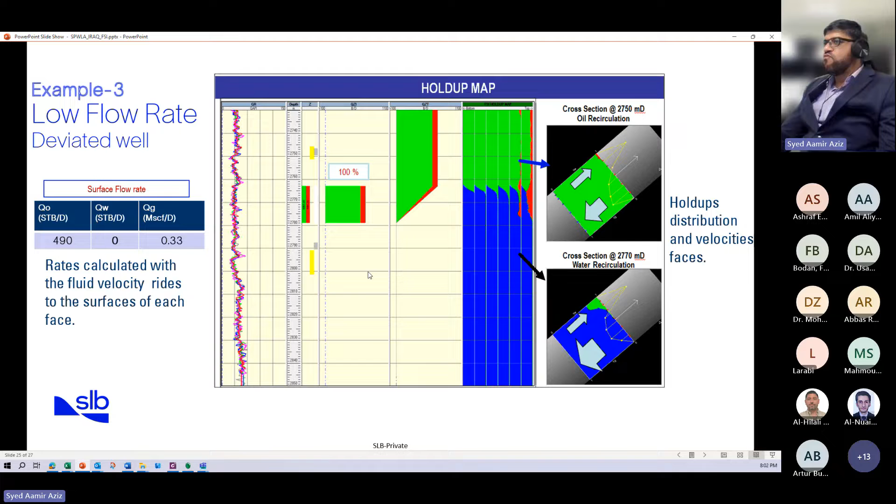Why underestimating? Because that single spinner is not measuring the representative velocity. Sometimes it's affected by the recirculation, as we see in the flow scan, where 3 spinners were reading negative velocity and 2 were positive. But since it's a single spinner, it's affected by everything downhole, so it's confused whether to read positive or negative velocity. So it's underestimating and not giving the representative velocity. This is the velocity computed from the single spinner, and this is the flow profile computed from the single spinner, but it's only computing 200 barrels.

So that shows when we compared both data sets, the conventional spinner and the FSI spinner, it shows the value of the production logging multi-array tool. Even in a highly deviated, or let's say 45 to 50 degree deviated well, we still can see water recirculation and different phase segregation. So we need localized hold-up measurements and localized velocity measurements in deviated wells and also in horizontal wells.

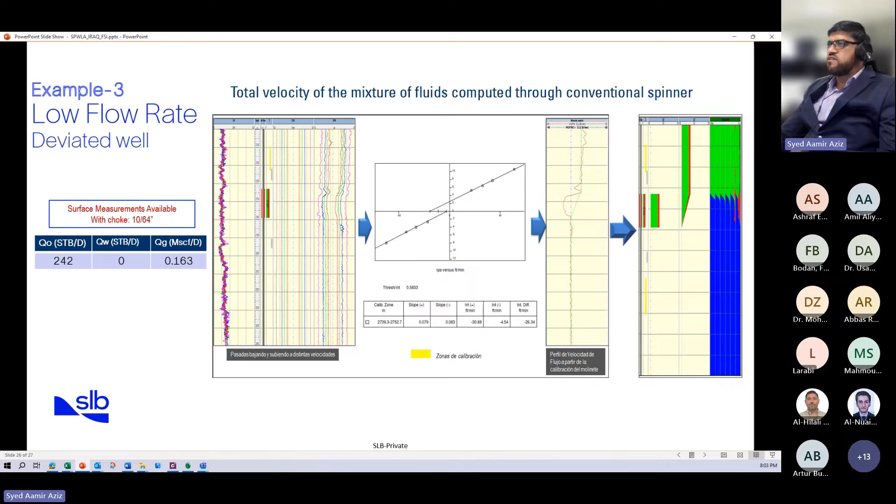Thank you, Mr. Syed, it was a really informative lecture. And this subject you presented, even for the Iraqi market, locally, is really important because most of our fields are going for deviated wells. The problem you presented, merely the last example, we encounter on a daily basis. So thank you so much.

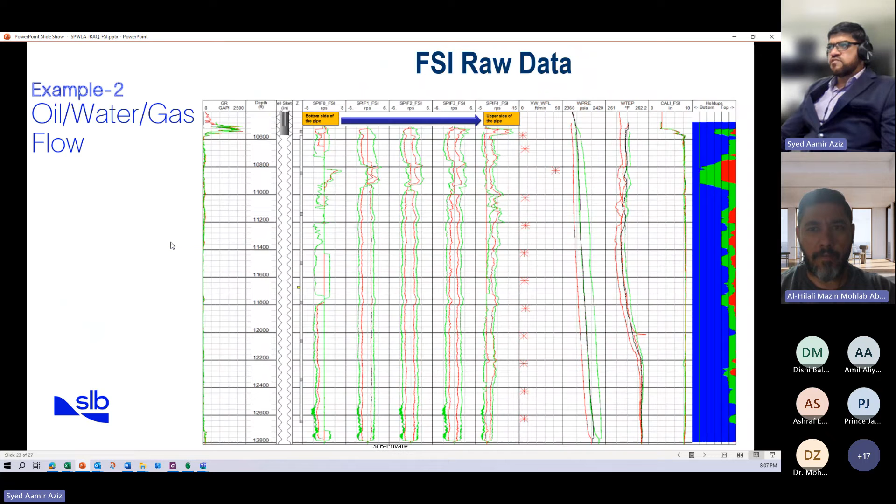Basically, every tool has a different design, and every tool behaves differently in downhole conditions. Whether it's inside the oil phase or the water phase, the spinner might behave differently because of the density and many other things, and the design itself. Each spinner has a magnet inside which converts the rotation into electrical current, and there are bearings inside.

So the mechanical design of each spinner has different rotation per second response in different fluids. The importance of spinner calibration is to eliminate the effect of the spinner's design and its behavior in different fluids. That's why we make measurements at different cable velocities and put them in a single plot.

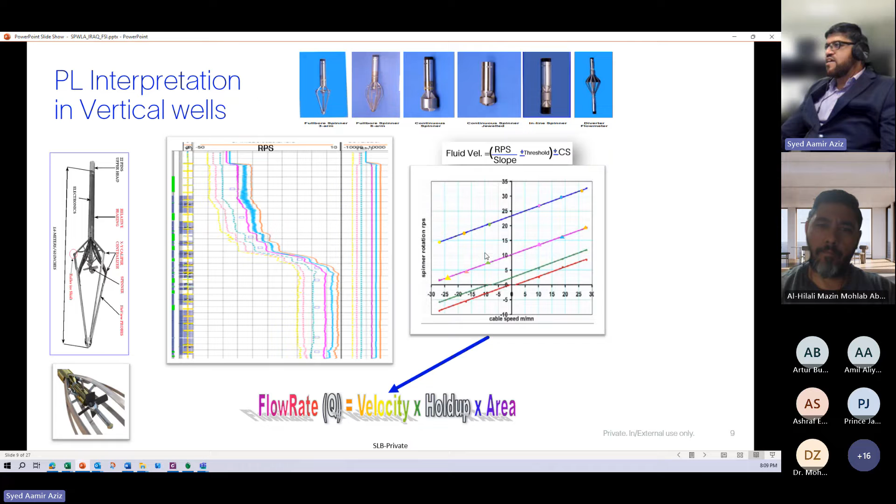And when we put all of these in a single plot, each zone should follow a straight line. When this line intersects the x-axis, that's the actual downhole velocity. Because we are going up and down with different passes, we don't know the exact velocity.

The RPS of the spinner is affected by the tool movement, so we need to eliminate that tool movement and the different slopes. So we put all of this in a cross plot in order to accurately measure the downhole velocity. That's the main purpose of spinner calibration, and it's very important, by the way.